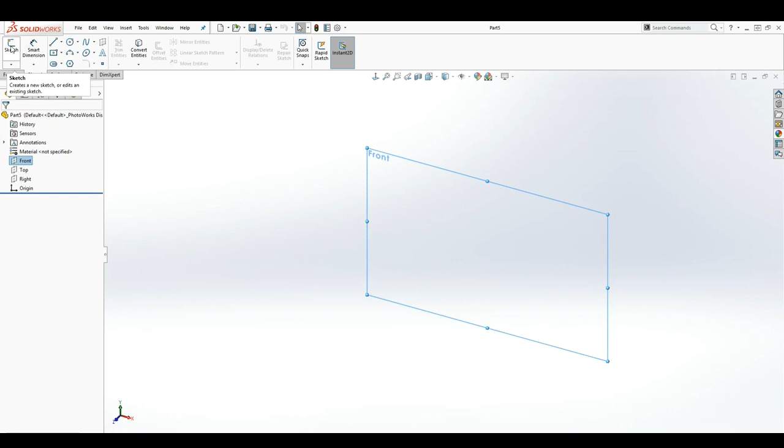And these are your sketch planes over here. We have the front plane, the top plane, and the right plane. Those are the three main planes SolidWorks gave you. So you can select your front plane over here and click sketch to start your sketch.

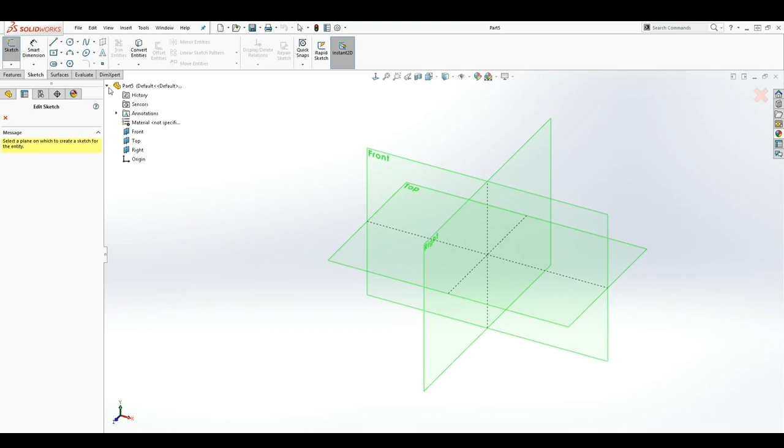Or let's say I want to start a sketch and I click on this sketch. Now as you can see, SolidWorks is telling me please select the plane on which to create the sketch for the entity. So now I can either select the front plane, the top plane, or the right plane on this screen to go into the sketch mode, or we can also click on this drop down and we also see the same option in there. So I will select the front plane and now I'm in the sketch mode.

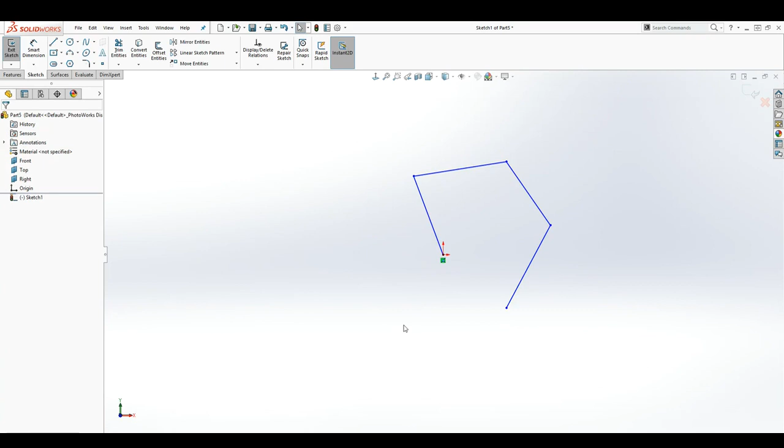And how you can tell you're in the sketch mode is you will see an exit sketch sign up here, and also done sketch and exit sketch over here, and you'll see this red gizmo here. So that is how you know you're in the sketch mode. And once we are in our sketch mode, we can just start drawing something. And that is how you select the plane to sketch on. So I'm going to exit out of that sketch without saving it. So now that is your sketch plane and how you draw on the sketch.

So SolidWorks also gives you the option to create a sketch plane. So to create another plane, in addition to these planes, we'll go into the features, select this reference geometry and select planes. So now it's asking for the first reference plane to constrain the plane on, because you have to tell it where you want to create that plane. So we'll click on this drop down and we'll select our front plane. By default SolidWorks is going to make the plane parallel to the first plane you select.

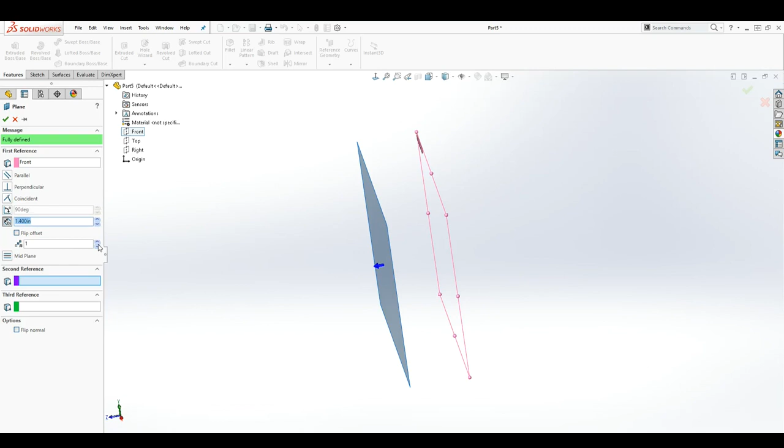So now we are telling SolidWorks this plane is 1.4 distance from the front plane. As you can see, we can increase and decrease this number, and that plane goes back and forth. Another thing we can do is offset it to the other side, and as we increase and decrease the number, the plane goes back and forth. And we can add as many planes as we want. So let's say we want 6 planes 1.5 apart from each other. We select that and click OK. So that is how you add planes.

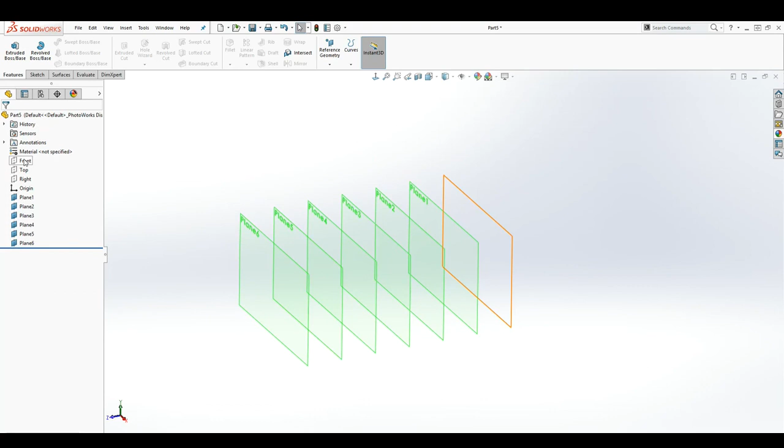And another way you can add a plane is by creating a sketch. So let's say I go on my front plane, go to sketch mode, and I just draw a midpoint line, something like this on this front plane, and I will exit that sketch. So I have that sketch on the front plane.

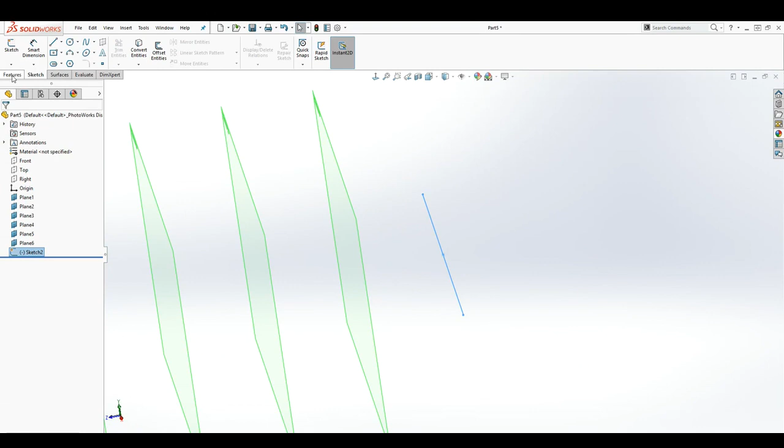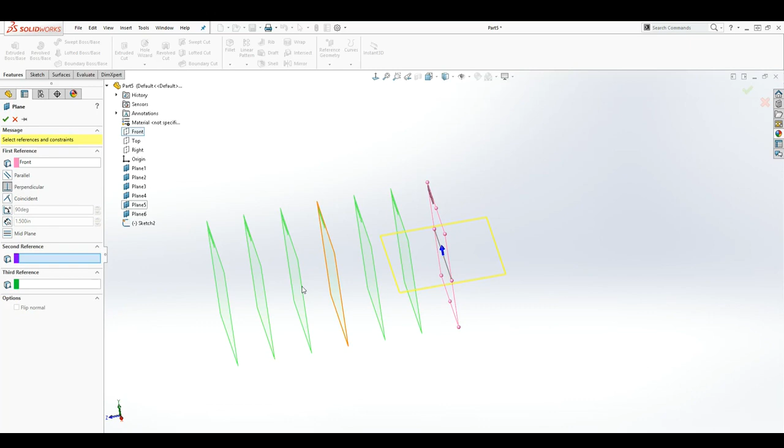So I can go back, make another plane, and again I'll select my reference plane, which is my front plane. SolidWorks is putting it parallel, but what I want to do is a perpendicular plane. As you can see, the yellow thing is showing my first constraint. I want this new plane to be perpendicular to the front plane, and I have to select the second reference. So now I'll select that line. As you can see, SolidWorks has created a plane that is perpendicular to that line. And now if I click OK, we have our new plane, perpendicular to the front plane.

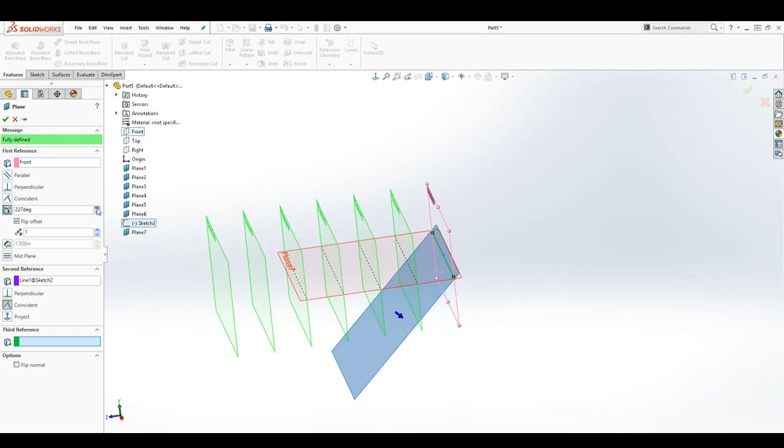And I can draw another plane. So we'll go to reference geometry plane, and I'll do the same thing on the front plane, perpendicular, and select my second reference, which is that line, and this time I want it angled, so I can change the angle on that plane. As you can see, if I flip it, it goes back in the other direction, and you can change the angle on the plane. So that is how you add an angled plane, and we click OK.

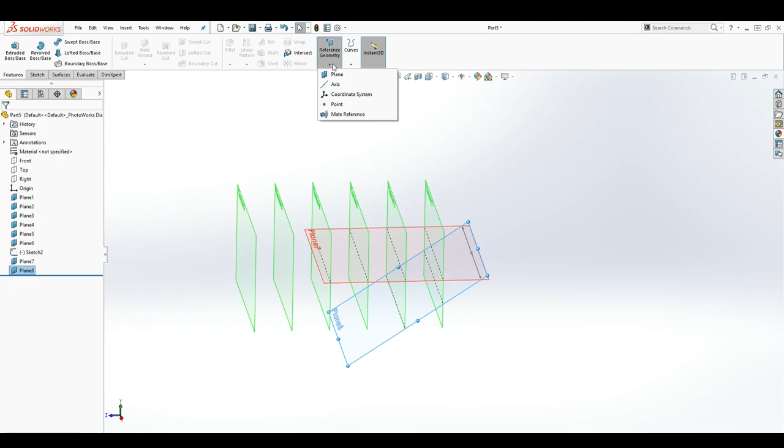And the last example we're going to cover is the mid plane. So now I have these two planes here, and let's say I want to draw a new plane in between these two planes. So we can go back to the feature tab, reference geometry plane, and it seems like my plane was selected prior. Let me just exit out and make sure I'm not selecting anything. Then I'll go back into reference geometry plane.

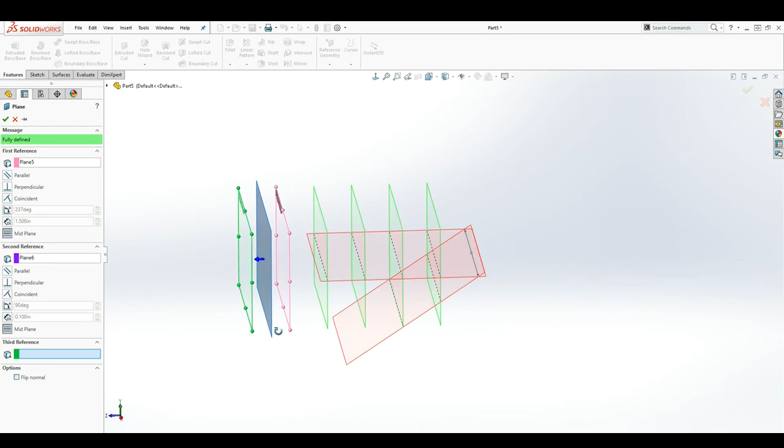So I want to put a plane between these two planes, so I'll select this plane as my first plane, and let me just make this number 0 for now. Oh, so even without doing that, I can select the mid plane. So now it's asking me for my second reference. I'll select this plane, and now as you can see, there's a new plane between. Click OK. And that is the plane feature in SolidWorks, how you sketch on a plane and how you make new planes.